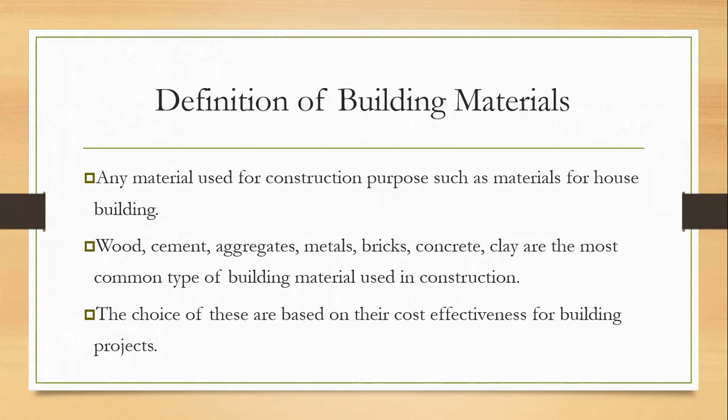The choice of these materials is often based on the cost of the material and usually the purpose of the material for the building project. From a public health perspective, you also have to consider the public health implications of the particular material types as well.

Many naturally occurring substances such as clay, sand, wood, rocks, and even twigs and leaves have traditionally been used as part of the construction of buildings. So we have natural type materials where very little or no processing has been done to them.

Apart from the naturally occurring materials, we also have many man-made products which are more or less synthetic in nature. So we might be talking about things like plastics, combinations of plastics, or alloys of different metals, etc.

The manufacture of building materials is an established industry in many parts of the world. It's huge, like the construction sector, for example. We have major manufacturing industries that have developed in order to facilitate the construction sector.

Some of these types of industries may be specialized in nature. For example, we're talking about industries that produce supplies for carpentry, plumbing, roofing, or even insulation work, which is typically most needed in temperate and cold regions. We don't often need it to such an extent in tropical regions.

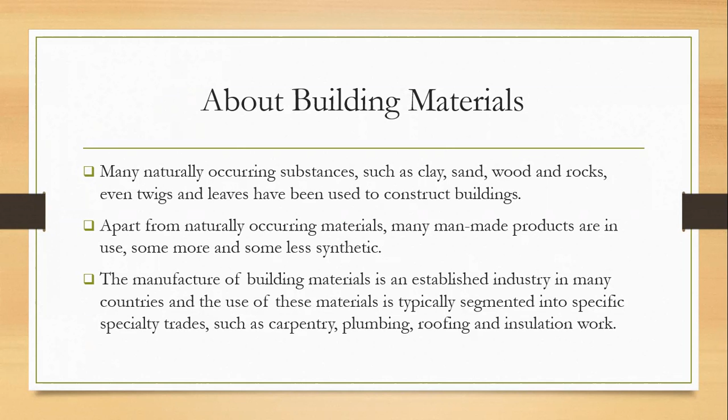Here we're going to start looking at some different categories of building materials. For example, we have natural construction materials, which would include unprocessed or minimally processed materials such as lumber from wood or glass. Then we have mud, stone, and fibrous plants used to make basic materials.

There are many parts of the world that still use a lot of these types of materials in the construction of their homes. These natural materials tend to do a very good job of regulating temperatures, keeping homes warm at night and cool during the day.

Then we have materials that are fabric in nature. For example, tents used to be the home of choice for a lot of nomadic peoples across the world, going back in history a bit.

Some typical examples you might be aware of are the conical teepees, the ones that look like cones, and the circular yurts, which are also tents but circular in shape, not domes, but a circular tent. You may have seen some of these as well.

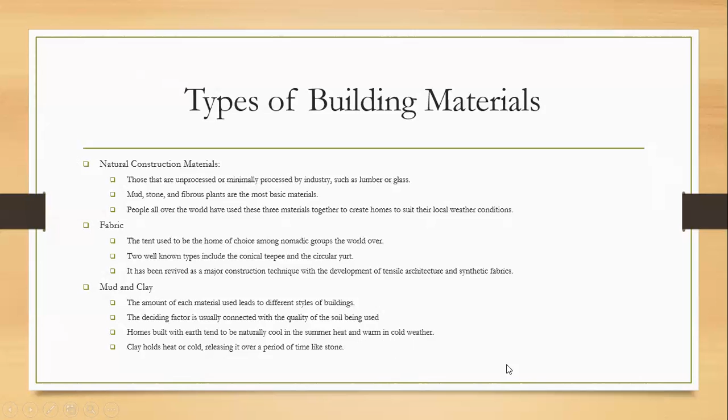Then we also have rock. Rock would be one of the longest lasting building materials, very strong, and readily available in many parts of the world. But one of the major disadvantages of rock is the actual weight of the stone and the ability to transport it, so that makes it very difficult. For example, granite is a much sought after building material because of its strength and durability.

Then we have thatch type materials, one of the oldest materials known. This involves the use of grass, for example. Grass is a good insulator from heat and cold, and it is easily available and easily harvested. We find many native tribes across the world still live in homes made completely of grass year round.

Then there's brush, similar use to thatch, but brush is actually made up of different plant parts, leaves, branches, etc. This type of building material is often found in tropical and subtropical areas such as rainforests, where leaves and branches are used to construct the building.

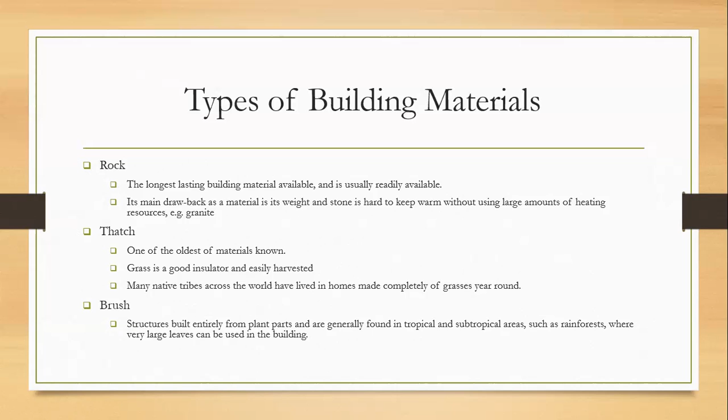Then there is ice, another maybe unusual one. For example, you would have heard about the use of ice to make igloos in the Inuit communities in the polar regions. Also, you may have heard of the use of ice to develop and construct ice hotels as a tourist attraction in northern areas that might not normally have a lot of winter tourists, but it's used as a tourist attraction.

And then, of course, we come to the more familiar types of materials now, like wood. Wood is a product of trees and sometimes other fibrous plants, and it's used for construction purposes when cut and/or compressed into lumber or timber to make boards, planks, and other materials we'd be more familiar with. This is a generic type of building material and is used in just about any type of structure in any climate type. Then we have the bricks and blocks.

The brick is a block made of clay or shale, but it's also made of lower quality mud, so you can make bricks from different types of material. For example, here in Trinidad, one of the brick types we would be familiar with is that reddish brown clay brick. Bricks were widely used as a construction material in the 1700s, 1800s, and 1900s, as they were more flame retardant than wood in ever crowded cities, and also fairly cheap to produce. I'm sure you could imagine that once they discovered a building material that was less dangerous in terms of promoting fires in those crowded cities, they would have gravitated more towards the brick.

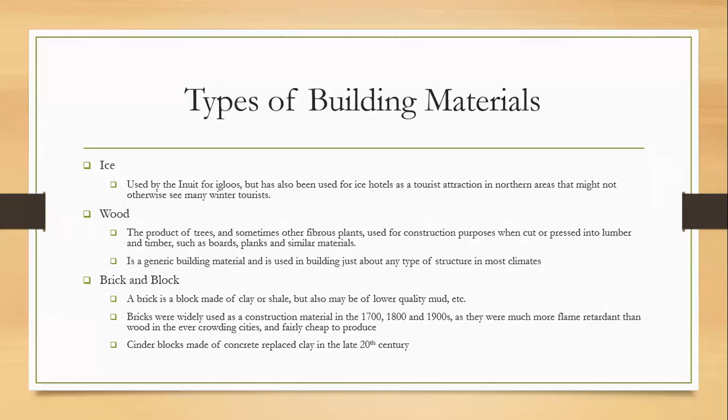Concrete is a composite building material made from a combination of aggregates or composites and a binder such as cement. So the cement is the binder, and all those aggregates of different sizes and types of materials, stone, sediment, etc., the cement will bind it to make what we know as concrete.

Additionally, concrete has been a predominant material in this modern age due to its longevity, formability, meaning you can shape it into any shape or any type of environment, etc. And it's also easy to transport.

Then we also have metals that are used as construction framework for larger buildings, such as skyscrapers, or as an external surface covering. It can be used in many ways. For example, when you see larger buildings going up, you would see on the outside of these buildings, they put up these frameworks to facilitate the actual process of construction.

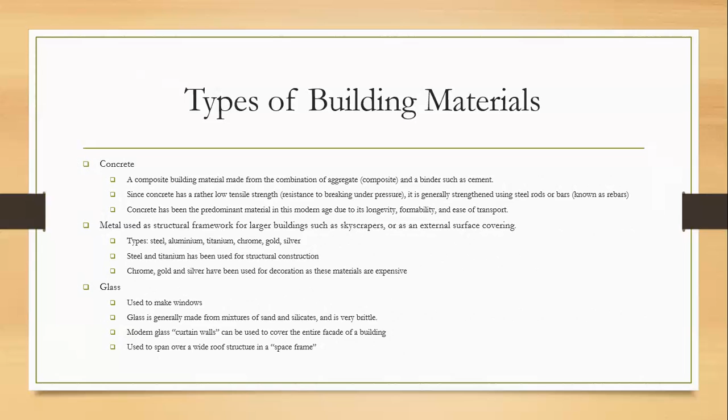We also find that a lot of modern buildings will actually have entire glass walls. It's used to span over a wide roof structure in a space frame. For example, you might be looking at things like sunroofs. Then we have ceramics.

How are ceramics used? They're mostly used as fixtures or coverings in buildings, for example on walls, countertops, ceilings. You can have ceramic tiles, etc., different types of fixtures.

We have plastics. Plastics cover a range of synthetic and semi-synthetic products that can be molded or shaped into different types of objects in the building, different fixtures, etc. These are used because they vary immensely in heat tolerance, hardness, and resilience, so they're quite versatile in terms of use.

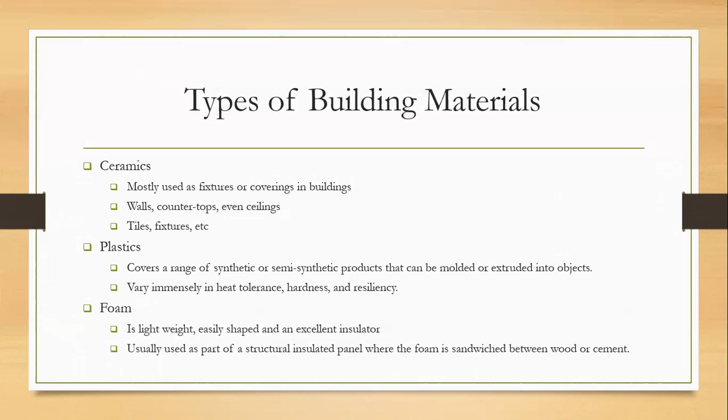We also have examples of foam material being used. These are lightweight, easily shaped, and an excellent insulator. Typically in more temperate and cool countries, you find that the foam would be used as an insulator, sandwiched between cement or concrete outer walls and the wooden inner walls to provide insulation against heat and cold.

Then we have cement composites. These are products made of hydrated cement paste that binds wood or other types of particles or fibers to make precast building components. For example, you might be familiar with prefabricated cement walls or concrete walls, so you're not building brick by brick. You have these prefabricated walls that can be used, and once these are available, you can put up a building structure very quickly.

Then we also have what we classify as virtual building materials. That would be used in the latter stages of your building. Once it's already constructed, you start putting fixtures together, photographs, images, text. Maybe a text might, for example, be, if it's a commercial building, a sign of various nature. So we refer to these as virtual.

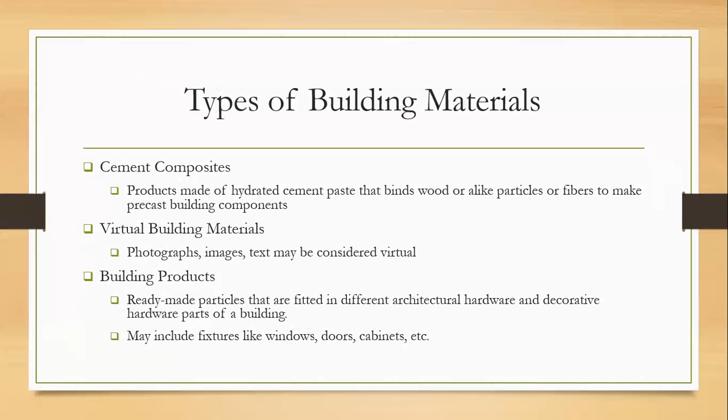Then we have other building products. We have ready-made particles that are fitted in different architectural, hardware, and decorative parts of the building. These might include the windows, the doors. These would have been fabricated elsewhere, so you would bring these in and fit them into your building.

Okay, so now we've looked at types of materials. Now we're going to look briefly at some of the various significant components of a building, starting with foundations and retaining walls.

The foundation of a building transfers the weight of the building, such as the walls and roofing, to the ground. Since this weight rests on the soil or rock depending on the geology of the location, engineers have to study the properties of the soil very carefully to ensure it can carry the load imposed by the building.

This is very important because improper study of the soil can create long-term problems not only for the durability of the building, but can also cause harm to humans and occupants if the soil is not determined to be strong enough.

Typically, rocky soils are stronger. Clay soils or sandy soils are considered weaker because of issues with integrity and stability, since clay can be easily waterlogged and sand is weak and very airy.

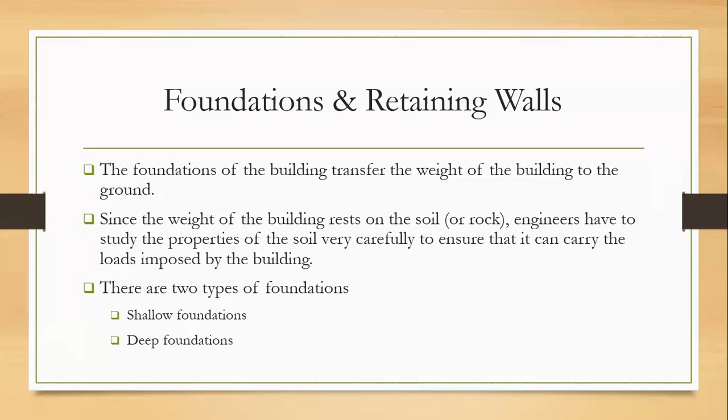So what do we do to try to strengthen a building? We look at the foundations that need to be used. For example, we have two types of foundations: shallow foundations and deep foundations.

We have shallow foundations, also called spread footings or open footings, which transfer the building loads to the earth very near the surface rather than a subsurface layer. If I flip to the next slide, you'll see an example of a shallow foundation here.

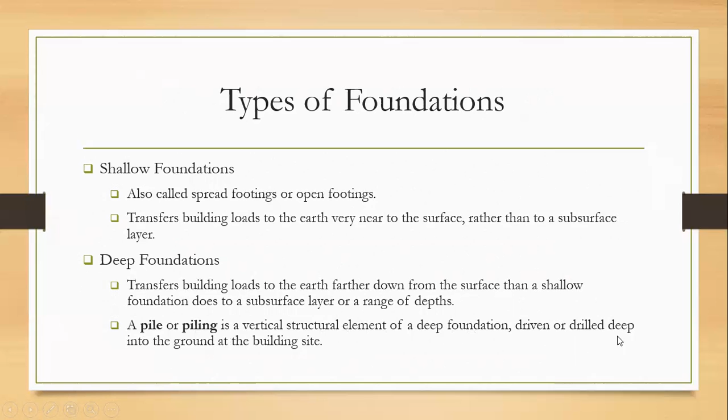Going back to our description of the deep foundation, we don't see it on the diagram, but it can also include a pile or piling, a vertical structural element of the deep foundation that's driven or drilled deep into the ground at the building site.

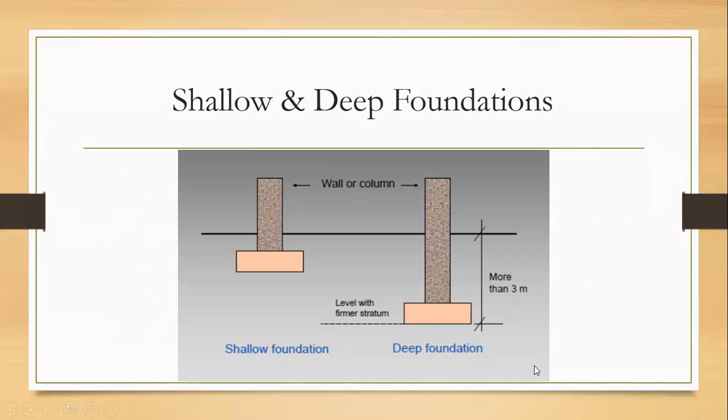For example, additional piles or pilings can be added here, from this base of the foundation, as other structures driven further deeper into the soil to add stability to your foundation.

Then we have retaining walls. What is the purpose of a retaining wall? They are used to support soil laterally so that it can be retained at different levels on the two sides, in other words, to prevent the soil from moving across the land surface from one location to the next.

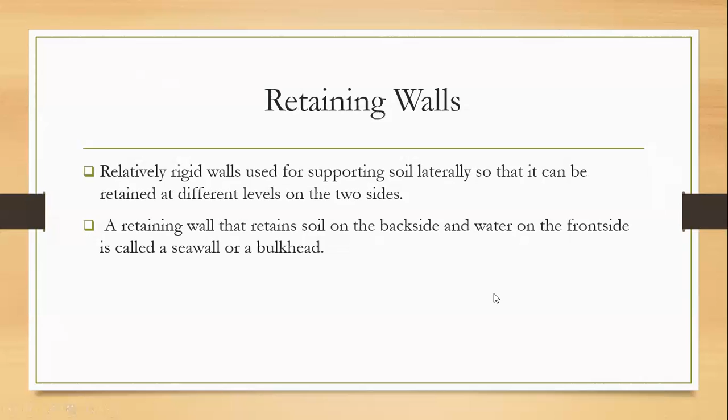So let's look at the gravity wall. The gravity wall holds the earth mainly through its own weight, and it can pivot.

Then we have the piling wall. This wall is good for high loads. It is good in areas where you have soft soil or tight space. Piling walls are usually made out of steel, vinyl, or wood planks that are driven into the ground.

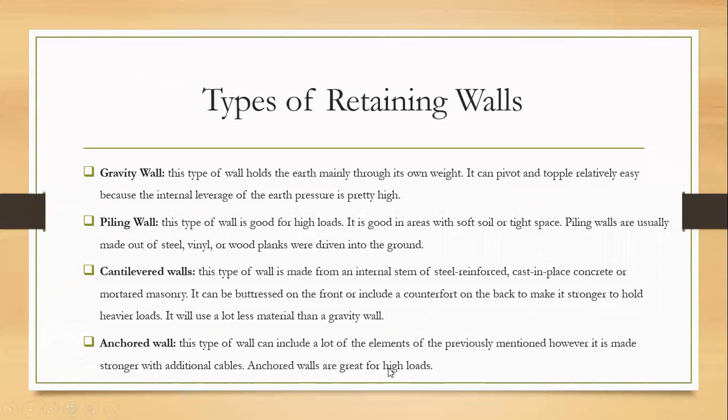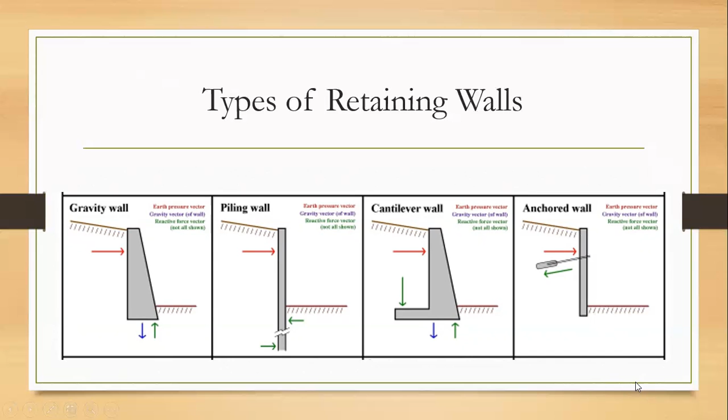So I just want to continue before we take a short break. So we would look at columns.

A column or a pillar in architecture and structural engineering is a structural element that transmits or transfers the weight of the structure above to the structural elements below. So we were just talking about foundations. Remember, a building has walls as well, and it also has a roof. Columns are usually those vertical structures that would transmit the weight of the rest of the building to the foundation. That is why it is very important for you to have a strong foundation, because that foundation is what is going to take the weight of the building.

So columns may be designed to resist lateral forces, those as the walls and the roofing, etc.